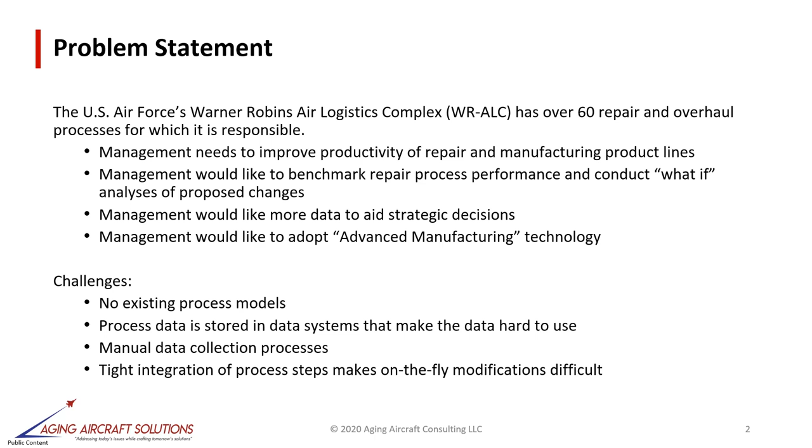Unfortunately, the Air Logistics Complex didn't have any existing process models nor easy access to systems storing process data. They have a manual data collection process and tight integration of process steps that add on to the daily challenges they face.

The objective of this project focused on the development and deployment of a digital twin. We focused on a C-130 remanufacturing line to provide a platform for Industry 4.0 functionality. We aim to reduce investment in planning facilities, improve productivity of existing facilities, increase system flexibility, and build quantitative business cases for proposed process or facility changes.

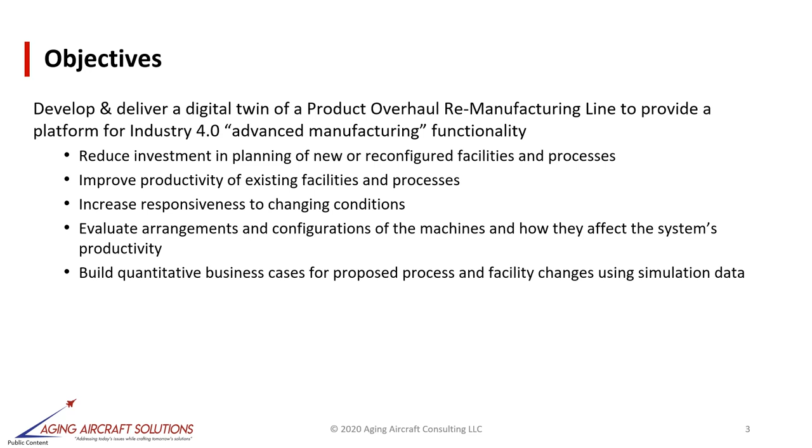In order to achieve our objectives, we needed to understand the value of advanced manufacturing. It applies new technology, networking, and computing power to improve the manufacturing process. With foundations in both smart and digital manufacturing, advanced manufacturing allows for a fully integrated system to have model-based controls and estimations. In particular, we were interested in how we could leverage models or digital twins, sensors or network connectivity, and ways to increase the flexibility of the system.

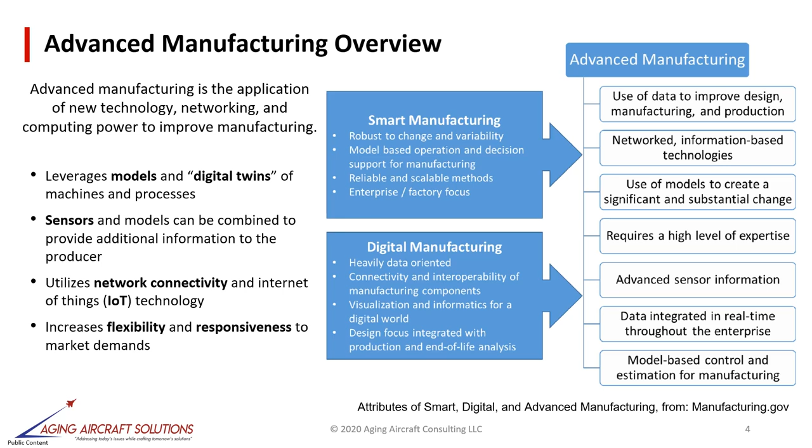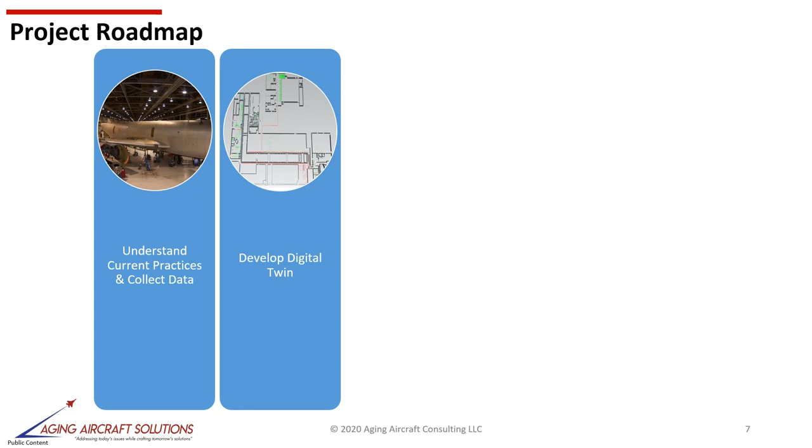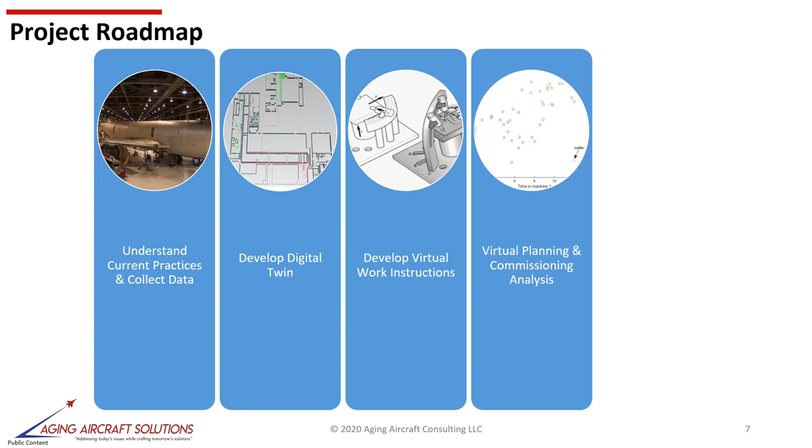The project roadmap started with research into current operations and data collection methods at the complex. We then worked to develop a digital twin of the facility and virtual work instructions for each process step. We then shifted focus to virtual planning and commissioning analysis, and finally reports on those analyses.

Our research started with collecting engineering knowledge of the processes and gathering data. Some of the engineering knowledge we utilized included assemblies and subassemblies, maintenance processes, part materials, and tolerance requirements. Once we had the data, we looked into data-driven methods and simulation approaches, including clustering techniques and optimization methods. The combination of these two allowed for the optimization of the process and virtual planning and commissioning.

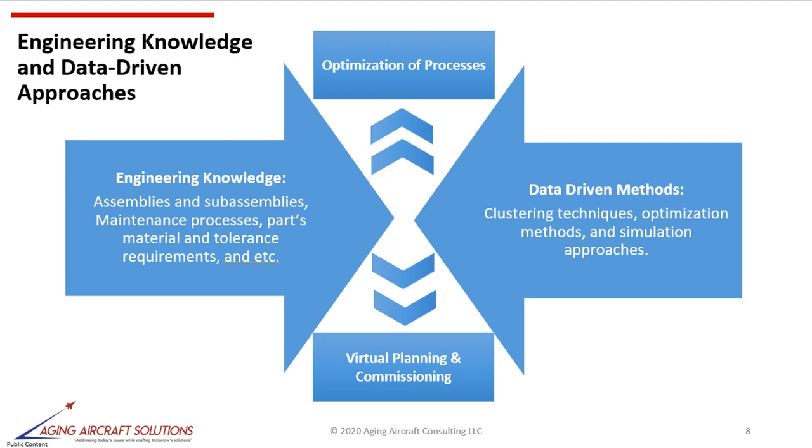While we were completing our research, we were looking into ways to highlight project-specific benefits of having a digital twin. One of the most important ones we identified was the creation of a virtual asset that could be applied across the entire organization. Others included the reduction of planning time, improvement of communication of changes, and enabling virtual commissioning of new equipment or processes.

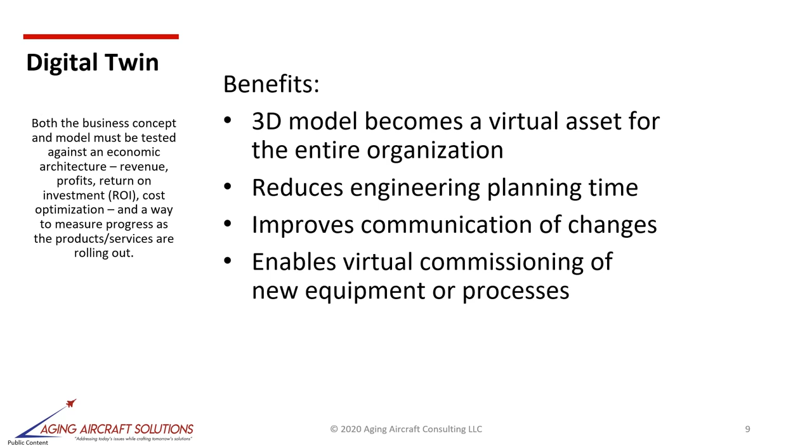From these benefits, we ideated potential use cases that could be addressed. This included monitoring by gathering statistical data on daily proceedings, maintenance by improving utilization, reducing asset downtime and lowering overall maintenance costs, training, communication by creating end-to-end visibility of the enterprise, and strategy and experimentation by verifying and validating concepts upfront.

In order to build the data-driven digital twin, we chose to utilize Plant Simulation. This was due to the fact that we could conduct discrete event simulations and experiments, as well as our customer already having Teamcenter licenses available to them. The advantages of this program were mapped easily to our potential use cases as well.

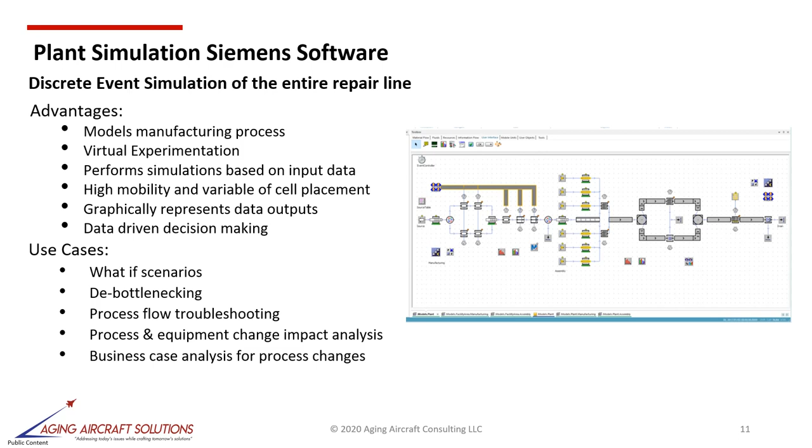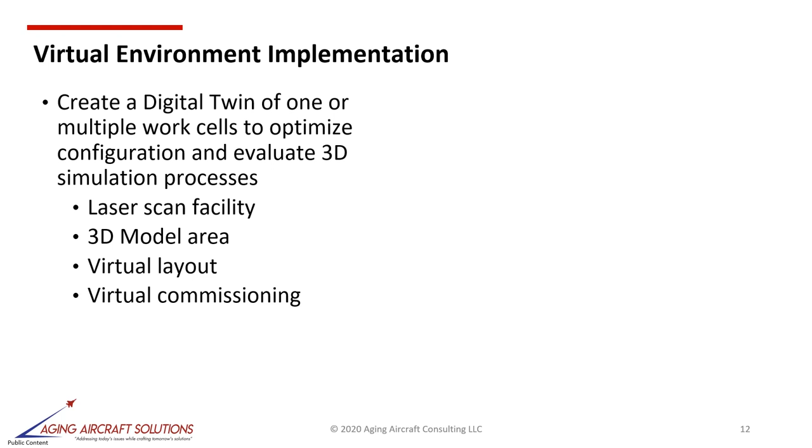Some of the advantages PlantSim provided were virtual experimentation, simulations being based on the input data, high mobility and variability of cell placement, graphically representing data outputs, and having a data-driven decision-making process. Plant Simulation's features also allow us to utilize items like laser scans of facilities and 3D models we already had on hand to provide a real view. It also provides a platform for which things like plant layout analysis can be easily conducted.

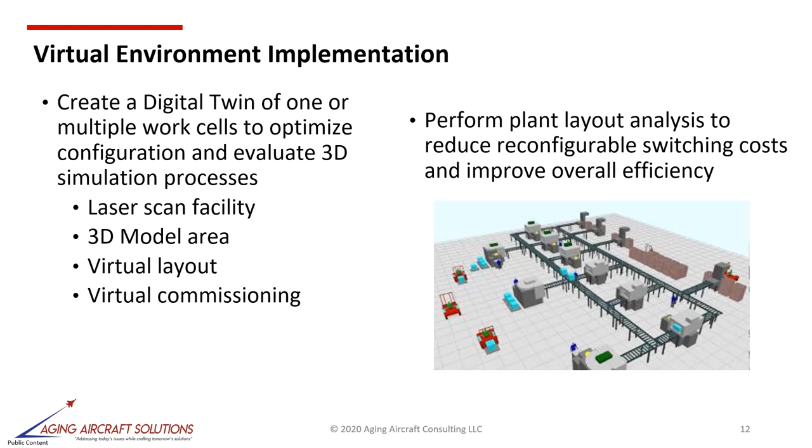Similarly, the virtual manufacturing tool we created is layered for different functionalities and use cases centered around the manufacturing process. First, we laid the groundwork with process step data for the cells. Then, we made an overview of what process step simulations would look like. On top, we placed our 2D process flows, and finally, the 3D visualizations were added. This provided the environment in which we could conduct virtual commissioning and plant layout analysis.

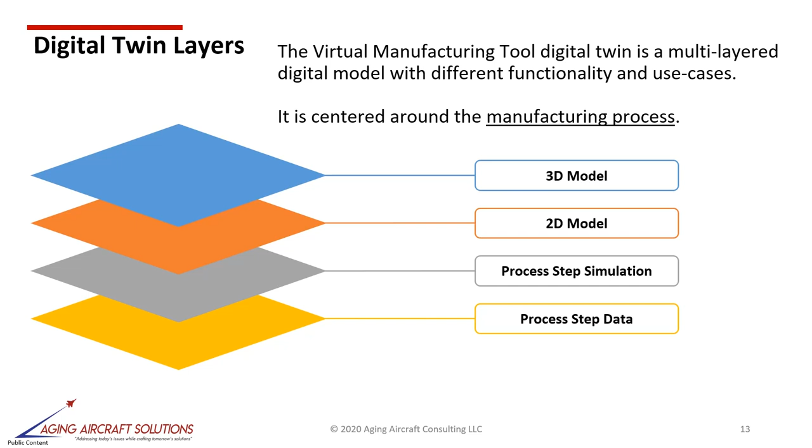Here's a view of the 2D process flow map we created of the remanufacturing line. There are three main propeller parts that we mapped. The yellow line on top is the lever assembly flow. The green line is the flow of the propeller barrel, and the red line shows the path propeller blades take. We purposefully mapped these stations so that a process engineer can easily understand the flow of information and materials.

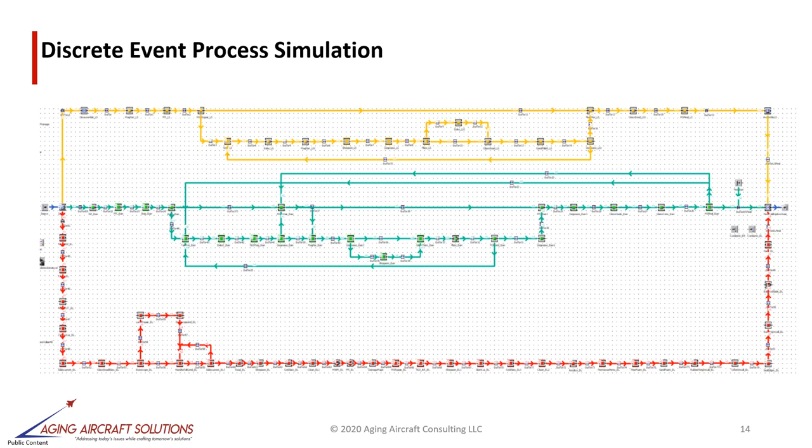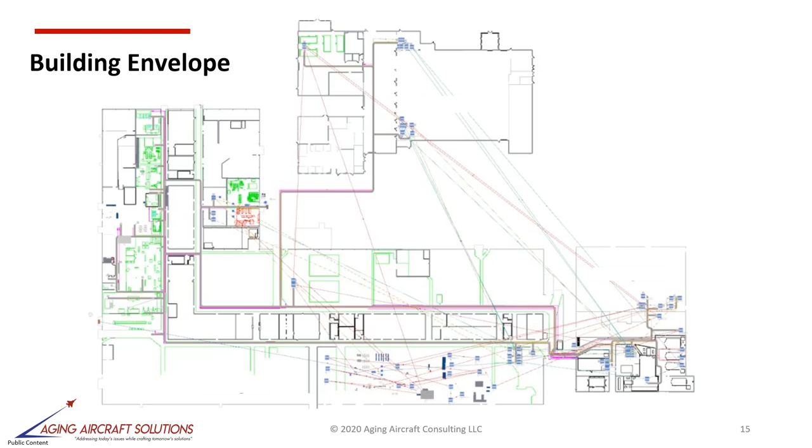Once we were able to understand the flow, we mapped process steps to their respective locations across the building envelope of the Air Logistics Complex. As you can see here, the paths cover far distances between several different buildings.

The next step for us was to collect point cloud data. In order to do this, we took laser scans of the overhaul process line we were mainly focused on, different areas of the three buildings, and general use areas deemed important by the Air Logistics Complex stakeholders.

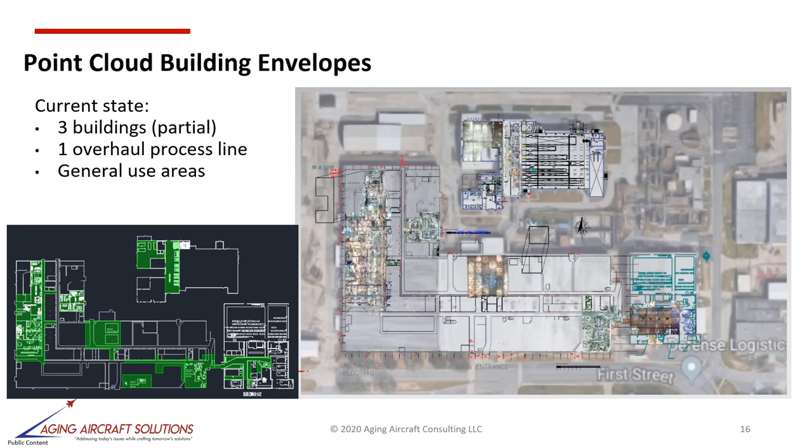We combined laser scan with work cells to the virtual layout, connecting them to the 3D visualization. Let's zoom in to this area here. This is an example of how we overlaid the scans with the layout. The source and disassembly and cleaning cells were placed first. Then the point cloud was overlaid. The point cloud is a single unattached assembly with no equipment modeling representing the cells.

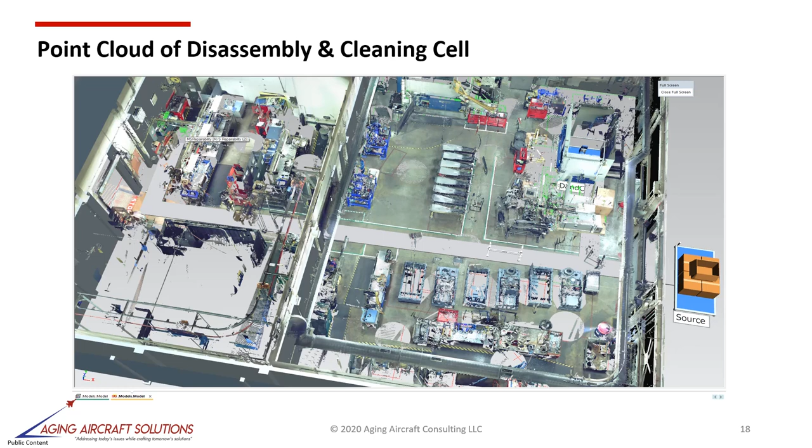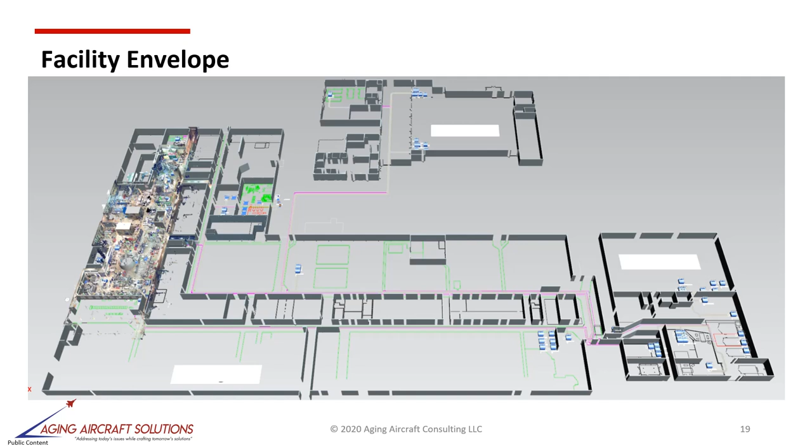While this was a good first attempt, we weren't satisfied with the level of realism. So we iteratively explored other ways to raise the level of fidelity. The way we achieved our highest level of fidelity was by connecting the point cloud data to 3D models of the equipment and cells. Due to a large majority of the blade overhaul process steps located on the left side of Building 140, we decided to fully implement the point cloud data to that area.

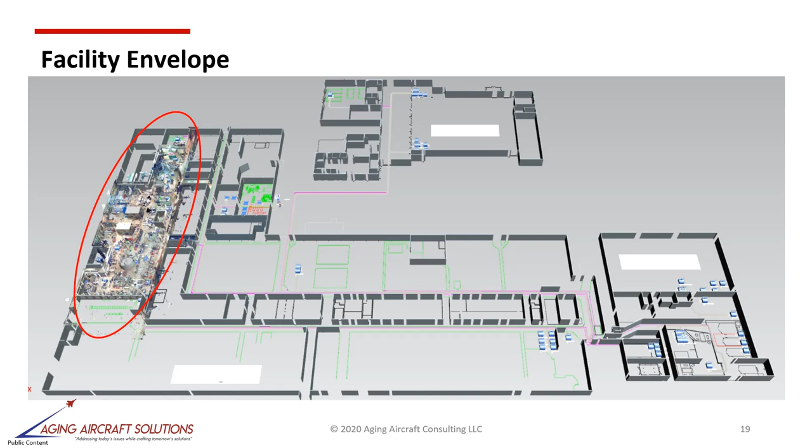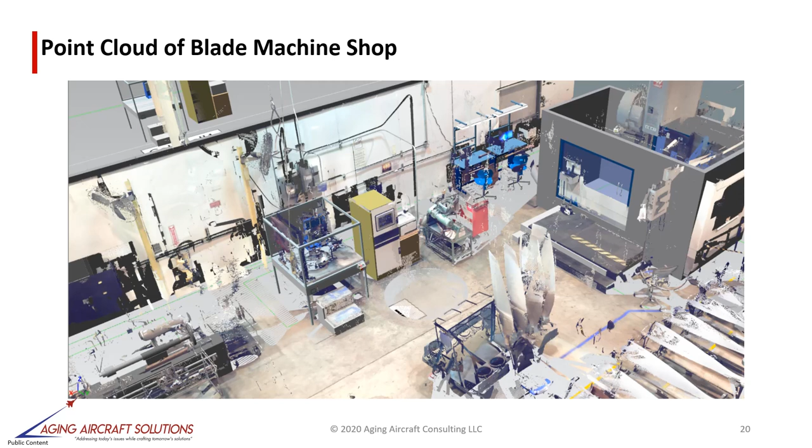Here's a close-up of the blade machine shop. So each piece of equipment that we're looking at is not only a 3D object, but also has a point cloud overlay attached to it. This level of fidelity was found satisfactory as it could allow us to easily visualize changes in the environment.

The total time to complete this environment was about 4 months. The first 2 months were dedicated to research while we scanned and compiled point cloud data. The next month was dedicated to encoding the 2D process flow map and building models of equipment. Finally, we used the last month to map locations of the process steps and increase the level of fidelity.

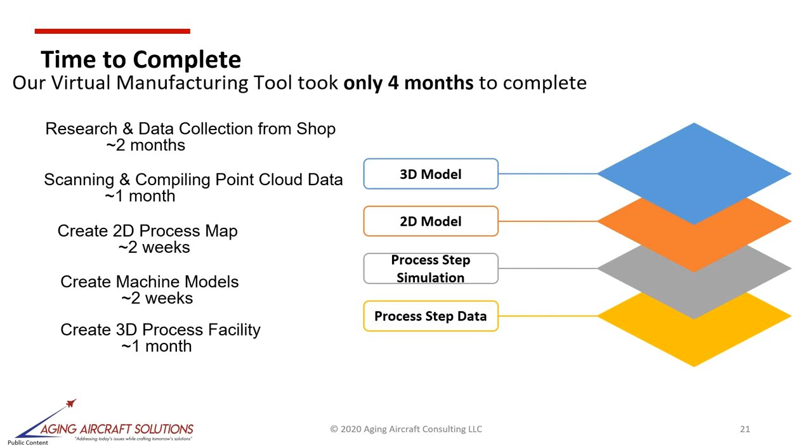One of the general use cases we've addressed with the virtual manufacturing tool is performing what-if analysis to predict impact on process cells and the overall process line. In this case, a process engineer will review baseline validated plant simulation metrics, make changes to the process cell parameters that are being considered in the what-if scenario, evaluate the scenario results and compare them to the validated baseline. Then the value of the change is calculated. Results are then presented to engineering and production leadership for approval, modification, or rejection of the proposed change.

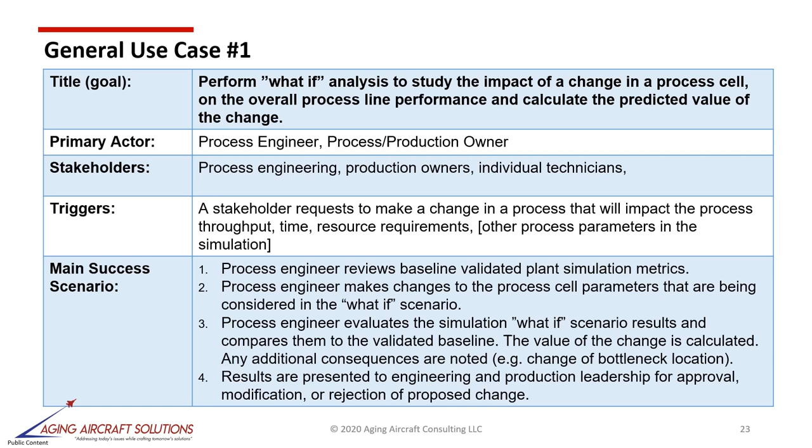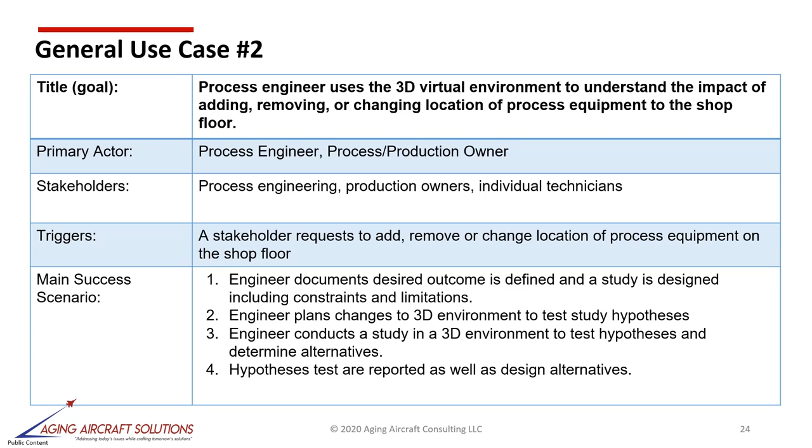A second use case we've deployed the virtual manufacturing tool for is understanding the impact of adding, removing, or changing equipment locations. In this case, an engineer will document a desired outcome and define a study to include different constraints and limitations. We will then plan changes to the 3D environment to test these hypotheses and determine alternatives.

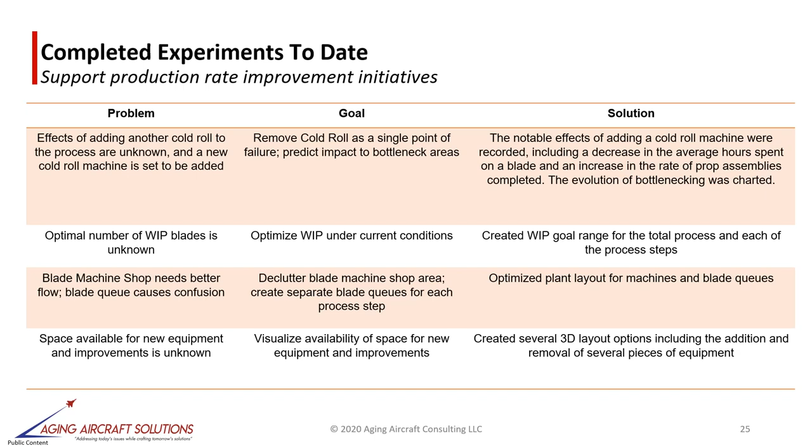Moving forward, we are looking to further the virtual manufacturing tool's level of data integration. This includes utilizing new AR/VR technology, improving AR cloud accessibility, providing information overlays and visual analytics, and effective skill training in the virtual environment.